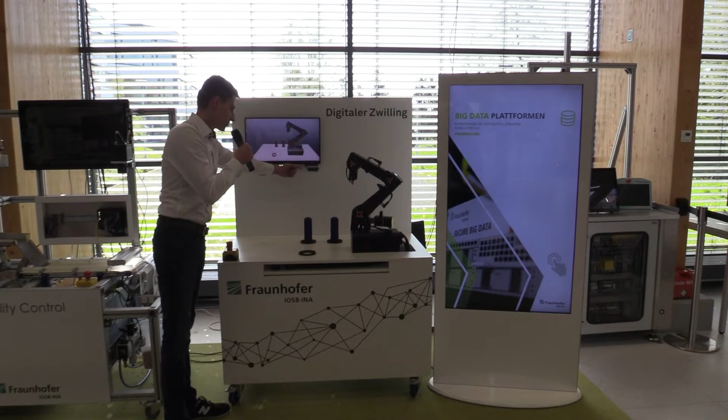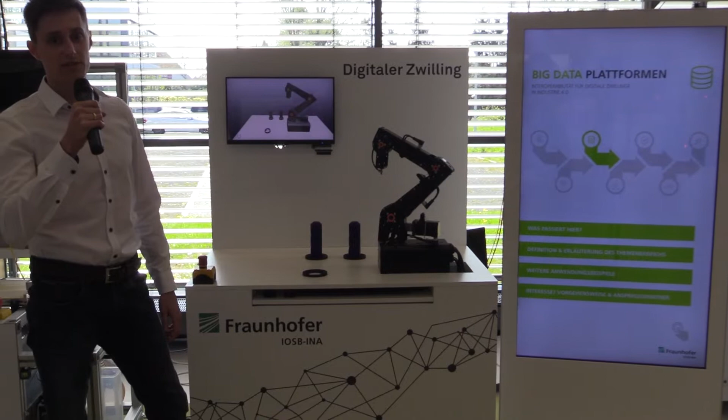The demonstrator itself consists of this igus robot, the digital twin of the scene, a depth camera over here, 3D printed cubes, and last but not least also a start and stop button. The original idea of this demonstrator was to evaluate the synchronization capabilities of OPC-UA and how we can integrate it to synchronize the digital twin with the real system.

The task of the robot itself is to grasp the cubes that are located at the rear trays, pick them up, and stack them one after the other on the front tray. To do so, the real state of the distribution of the cubes needs to be precisely measured and synchronized with the digital twin. For that, we have installed this Intel RealSense depth camera over here, which captures the real state, and I want to show you that.

As you can see, when I move the cubes around, I hope you can see it on the camera, the digital twin directly updates its state, and it's working. Another benefit of this is I can catch error cases like when a cube is missing, for example when it fell off during grasping. I can catch that, warn the user, and tell him to restore a valid state manually.

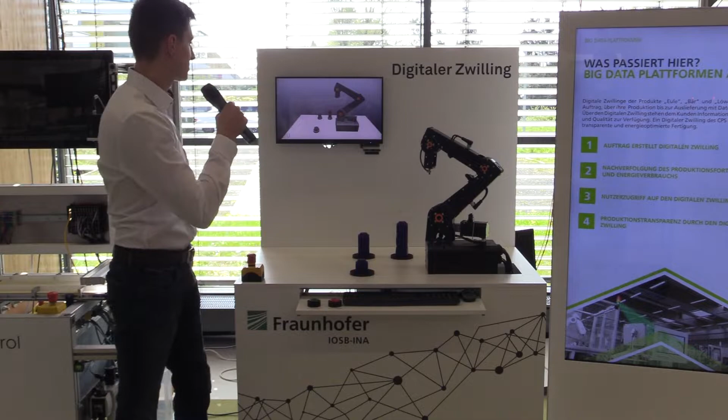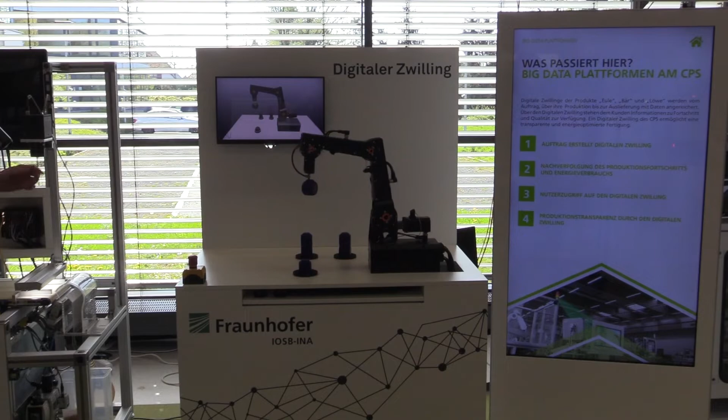But now let's see how the robot performs in action. The robot automatically detects the state and approaches the largest stack, and then continues with stacking the cubes on the front tray. But an interesting part of the demonstrator is also happening in the background. There, data is being gathered using OPC-UA and an InfluxDB database, and it's being brought to this big screen here.

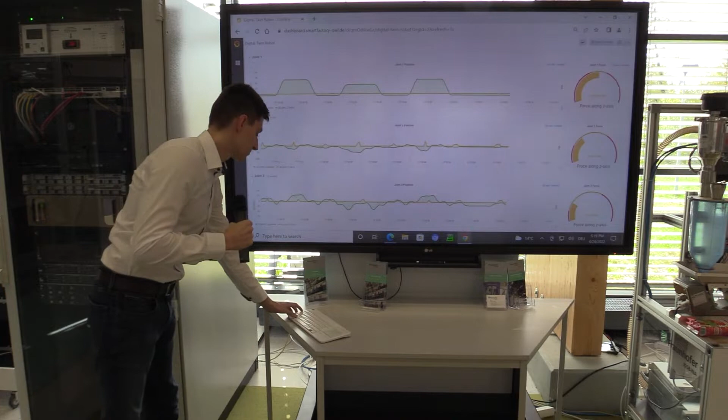For example, on the right-hand side, we have the velocity of the end effector, and it's being updated every second. Also, we see the state the robot currently is in. For example, right now it's stacking the cubes. We can see it here. Well, it's called assembly here on the dashboard, but there's also an inverse task of storing the already stacked cubes back to the rear trays. Also, we can see the individual joint values of the robot and the current forces that are acting on each joint.

Now, I want to show you the overall architecture of our demonstrator and the data platform behind it. On the right side, you can see all the visible and physical assets of this demonstrator, and here on the left side, there is the data processing and computing. Our newest addition to this architecture is the asset administration shell of the robot itself. It's being integrated using an OPC UA server, and for that we use the OPC UA companion specification, OPC UA for asset administration shell.

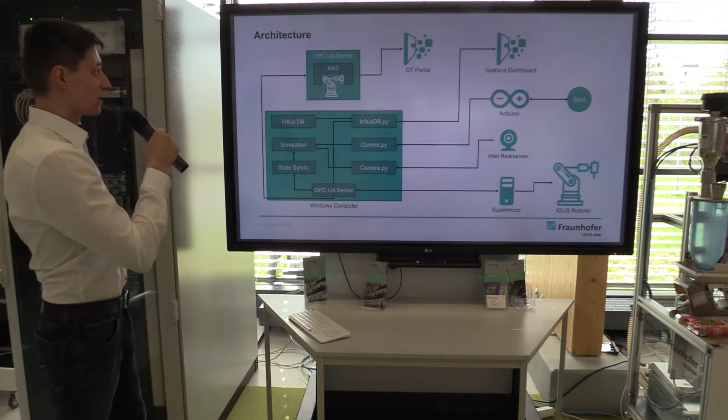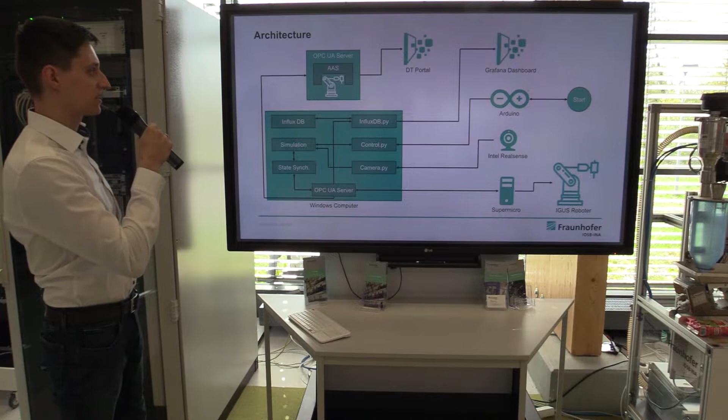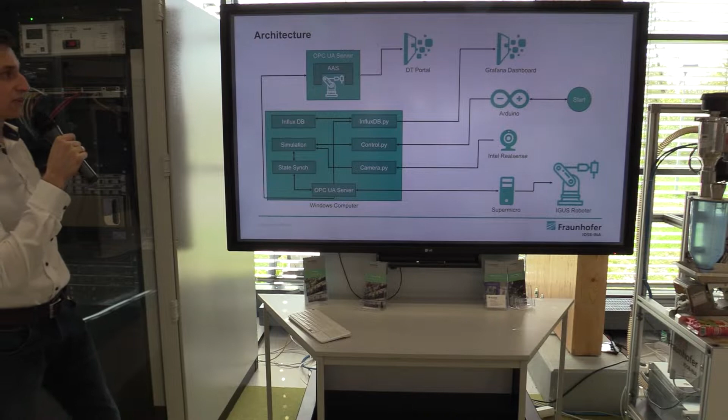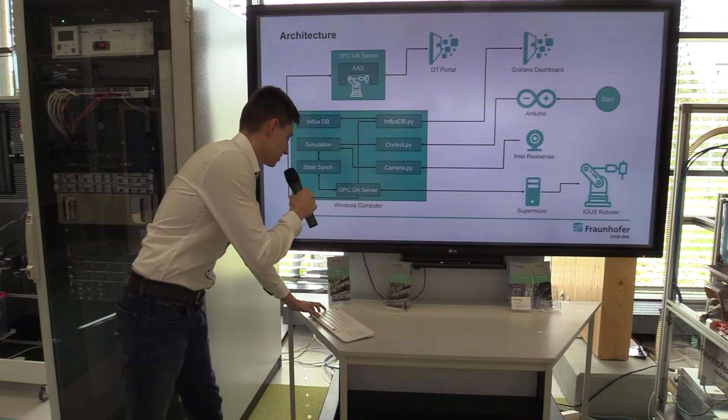This admin shell is being visualized using our in-house software that we develop. It's a part of the software called Digital Twin Portal, and it can be used to visualize data right from the admin shell. This portal is a Node.js web service that supports two different types of admin shells, namely AASX and, as we use it here, OPC UA. And now I want to also demonstrate to you what this web portal looks like.

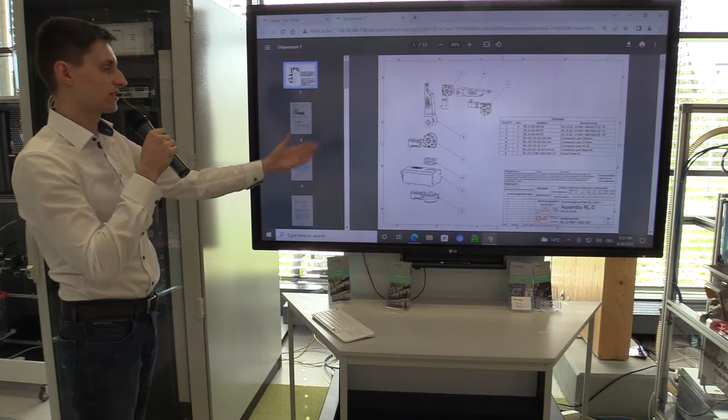Furthermore, we also have the documentation submodel available, and this brings a lot of benefits to us. For example, having the documentation readily available when the product ships saves money and time, but also reduces resource consumption on the manufacturer's side, because I don't have to print a stack of papers that costs money and needs time to ship. Here, for example, we can also directly visualize the PDF document from our tool, and here is the data sheet of the robot and all of the components the robot consists of.

Furthermore, we also have the submodel operational data, which holds the process data the robot produces. We can visualize this, as we have seen on the Grafana dashboard, seeing the individual joint values, and we can let them update in real time. If we press the play button here, you can see as the robot moves those values change. But we also have another feature: we can draw directly a graph with the values we have selected, and it updates in real time as the robot moves.

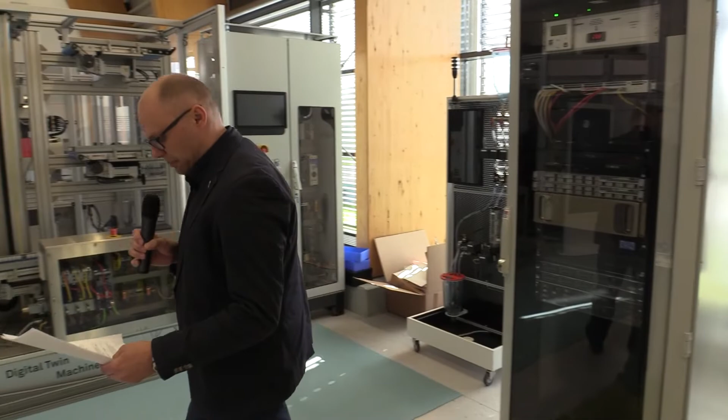Thank you, Mark, for this very interesting presentation and very practical application for the digital twin. So now we will go one step further, and we will see how the digital twin can be used to build a production system. Here we have, of course, not a big plant, but we made a small version

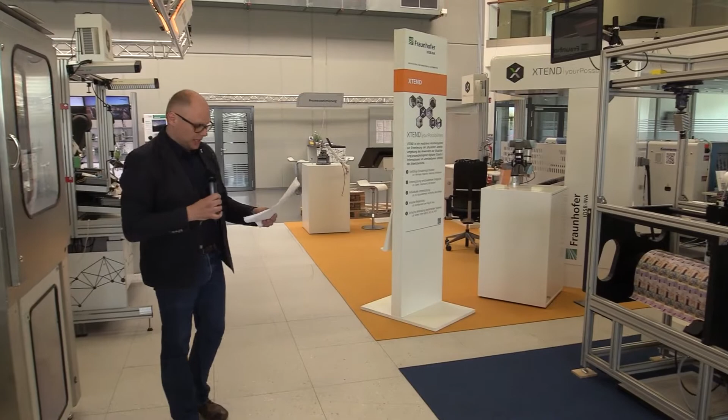of the whole production system, and we used the digital twin technology to implement skills of production components. So in this case, let's say every production module can express which kind of skills it has, and whenever a skill is needed in a production process, it can be used. So we want to welcome again Henning, who will tell us a bit about this exciting project.

So Henning, you're again the speaker. Yes, thank you. This time without any introduction, so you know me already.

What I would like to introduce here is one of our demonstrators, which was constructed as part of a research project called DEVEKOS. It's over already, but as you can see, maybe here on this field there were a lot of companies involved. Not all of them were involved in DEVEKOS, but some of them, and as part of the project we assembled this nice demonstrator, which is a real manufacturing system for fidget spinners.

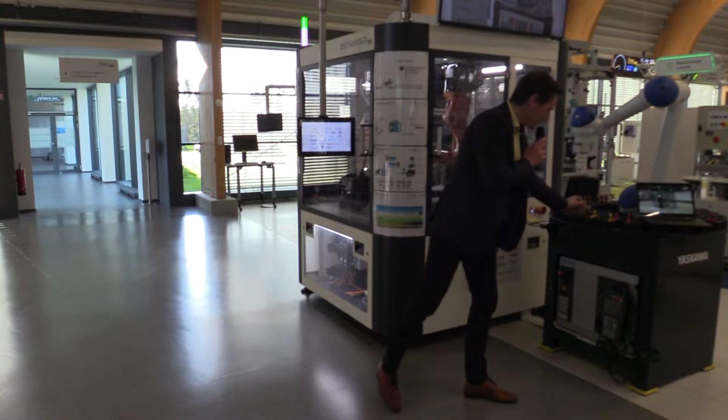You can see them right here. This fidget spinning device might be still known to you. This was a hype a few years ago, and at this time in 2018 we decided to build them with this manufacturing system, but right now this hype is already over, I think.

What we are doing here is we have a system consisting of altogether 6 different manufacturing stations which are assembling this fidget spinning device, and all of them are set up in a way that they are decentralized, so there's no central PLC as part of the whole thing. Instead, all the different control functions are implemented on a per-station level, and the new thing, which was already introduced by Lukas, is that we are doing this skill-based.

That means we also have a kind of digital twin of each station, modeled as a skill-based system using OPC-UA. So we are also using OPC-UA for this, and all those stations are able to communicate what they are able to do in the end.

And if you go further down here, you have a kind of hierarchy. If you look into the different levels, you can see that we are here on top, at the level of fidget spinner production. This is the whole system. If we drill down further, we see that this is one station, and this station consists of substations, and all substations have a specific skill which they are able to publish.

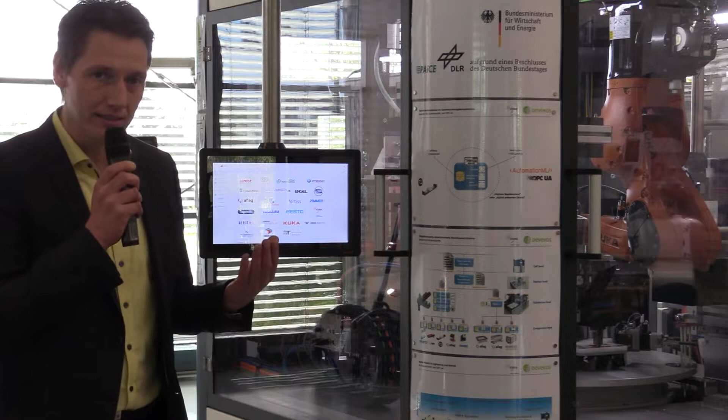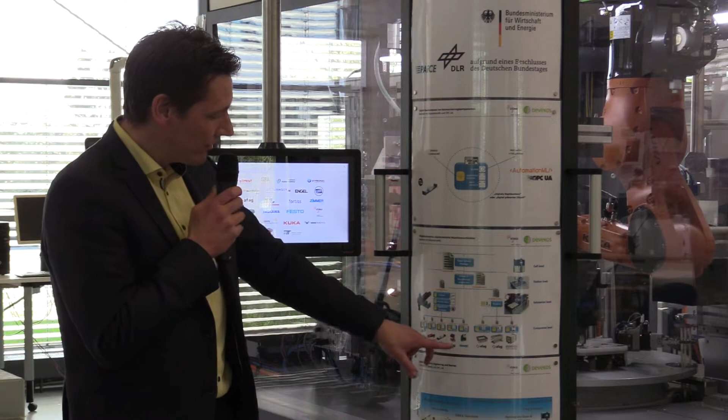And then based on these skills, we can set up the engineering in a completely new way, compared to the old times where everything was done more on a centralized level. And we can further drill it down even to certain components which have some intelligence on board. Maybe in the future it will be further extended, but right now it's a little bit limited, let's say.

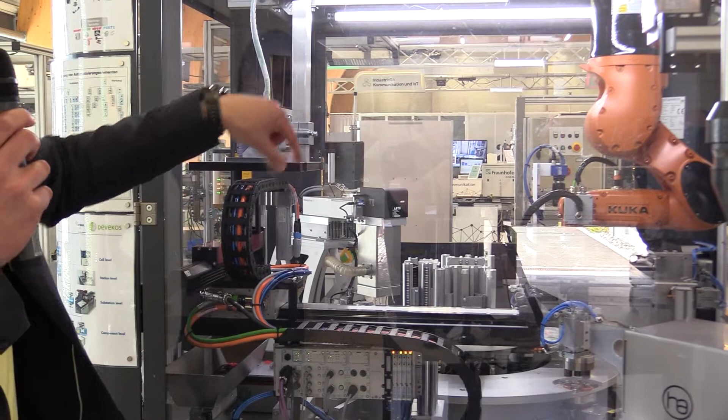If we go into more details, let's drive around the corner and see what's going on here in the system. We can see there's a real robot arm as one station taking the first part, and then it's turned around as part of the manufacturing process. In the end, we get out our fidget spinner out of this thing.

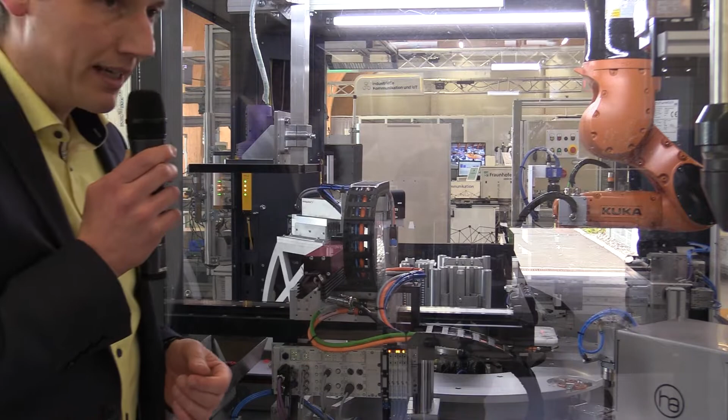A very interesting topic here is that it's basically an activity of a lot of companies, and everything is working in an interoperable way. So we were able, using OPC-UA, to put everything together from different companies, and everything is working together as intended, which is quite hard sometimes. Here it works because of OPC-UA as the main basis or main technology.

That's one part we can look at. And speaking of the digital twin, we were also able to provide a whole model of the system in a virtual way, which can be used in the same style as we saw before on the station, using graphical representations, but also looking into details of each station to see running parameters of the operation of the whole system. I would like to show this to you as well.

Maybe Lukas, you can give me a hand with the microphone. Sure, because I need to hold my laptop in a way. So I hope you can see it. What you can see here right now is a virtual representation of the whole demonstrator. This is openly accessible, so if you like, you can also go to that website and take a look into this by yourself. So this would work.

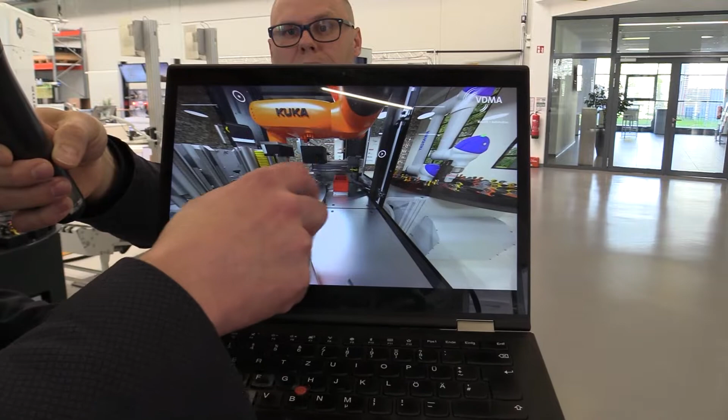What you can do here is walk virtually into the demonstrator, into the whole system, and take a look at the different stations you can see right here. Whenever you think you would like to have more details, you can just click on those different topics. You'll have additional information here, more or less as a data sheet for this specific station or substation, and here you can get all the details you would like to have.

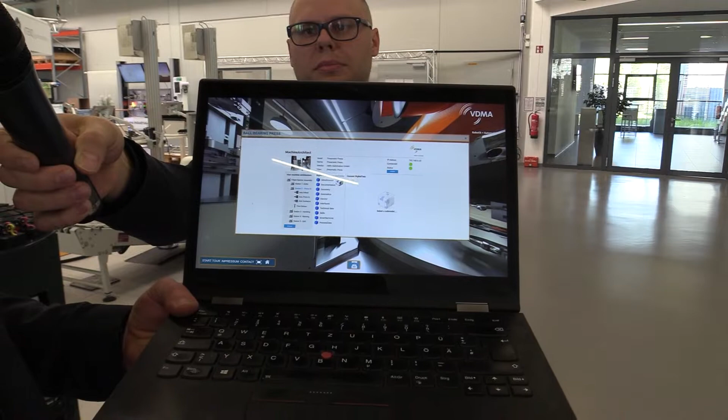So that's already an exact virtual representation, at least with a limited amount of information. It's not modeling all different steps, and you cannot see everything in real time, but it's at least the first step to make it visible to an operator or to maintenance personnel or whoever needs it.

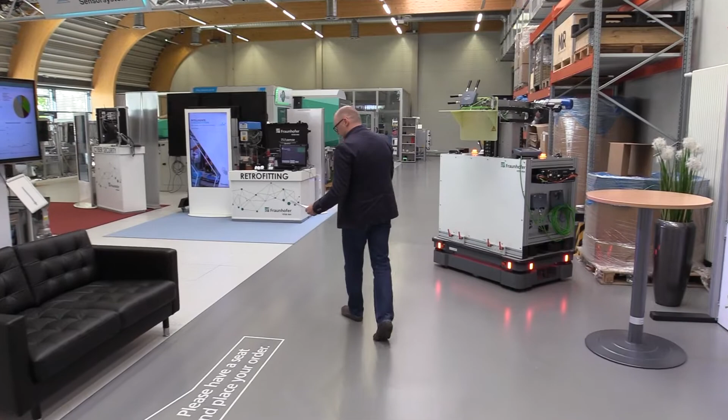We have a few more digital twins around in the whole smart factory. However, we will not show them to you right now. So right now we are actually starting with 5G or communication topics, more on higher layers. So right now we will talk about 5G, and we have in the smart factory obviously a campus network.

And we have also an expert in 5G who is not only a researcher here at inIT, but also a deputy chair in 5G-ACIA. Welcome, Arne. I guess you will tell us a bit more about 5G in the smart factory. Thank you, Lukas. Hello, everyone. My name is Arne Neumann, and I want to give you some overview about our 5G activities, which we have here in the SmartFactoryOWL, the application of 5G and also our research on it.

So we have an installed 5G system here, and the first step we needed to do when starting with this activity was applying for a frequency license. Since 5G New Radio operates in licensed spectrum, we had to apply for such a license, and we even had to contact a federal authority for this. The process was not very time-consuming, not very difficult. That was a really nice surprise.

After that - so the frequency range we use in Germany is from 3.7 to 3.8 gigahertz. And the second thing we needed to do is purchase a system. Actually, we have two systems installed here in the SmartFactoryOWL.

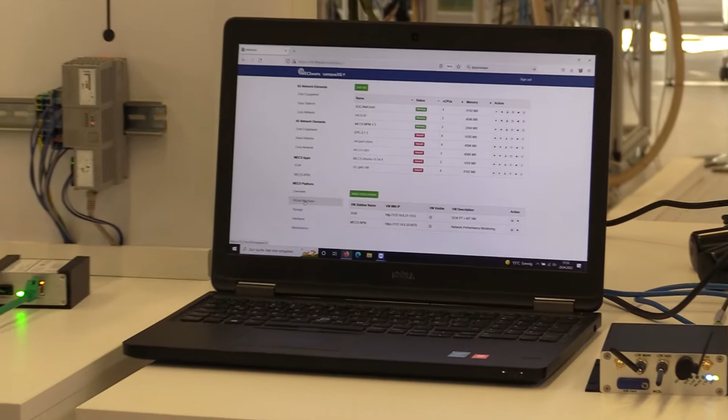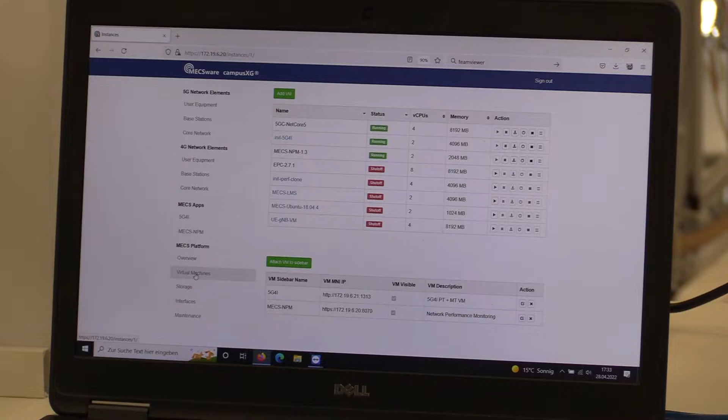So the system vendor is MECSware, and you can see here the dashboard which is provided by this company, which shows the server infrastructure. So this server does not only host the 5G core network, but also virtual machines. This shows some edge cloud capability. And we also have virtual machines running some processes in this edge cloud, like here inIT 5G4i, which is a virtual machine supporting some early results of our research project 5G for Industry.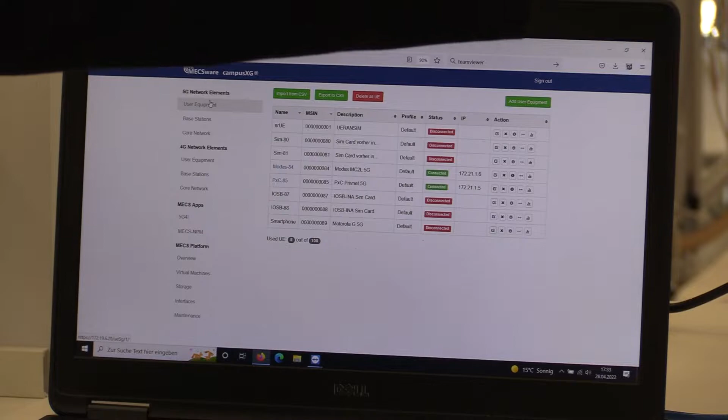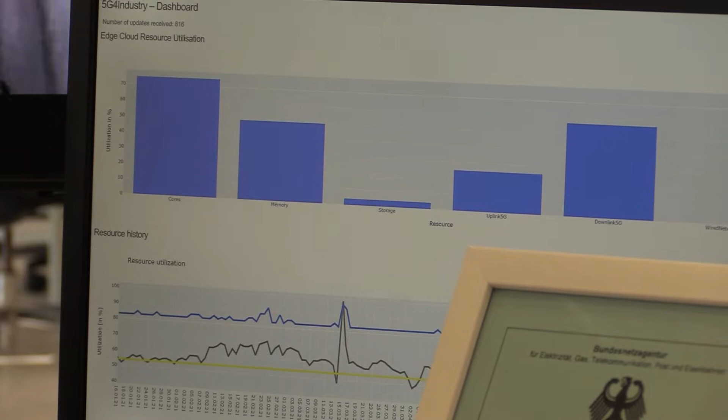Another view shows the user equipment, like here. So you can see that a couple of user equipments are configured, but only two of them are active at the moment. And on the other screen, on the right-hand side, you can see the dashboard from the 5G4Industry project.

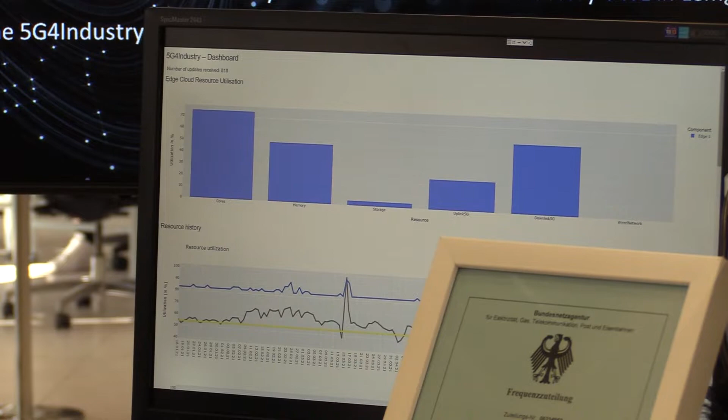So this project aims to support both the long-term planning and the short-term management of ICT infrastructure in the production, which is like a backbone for the factories of the future and supports concepts like edge cloud computing and function virtualization, softwareization.

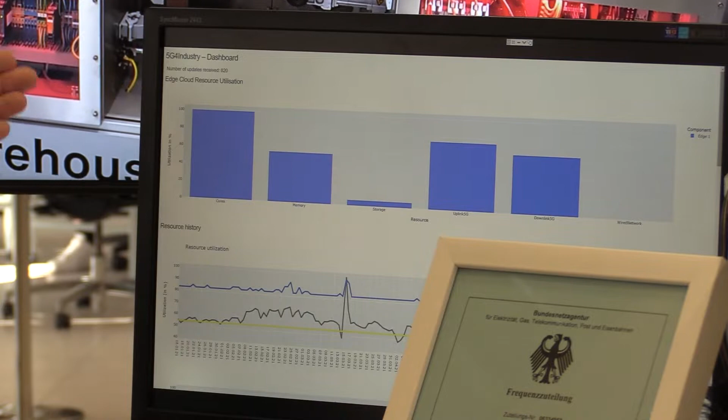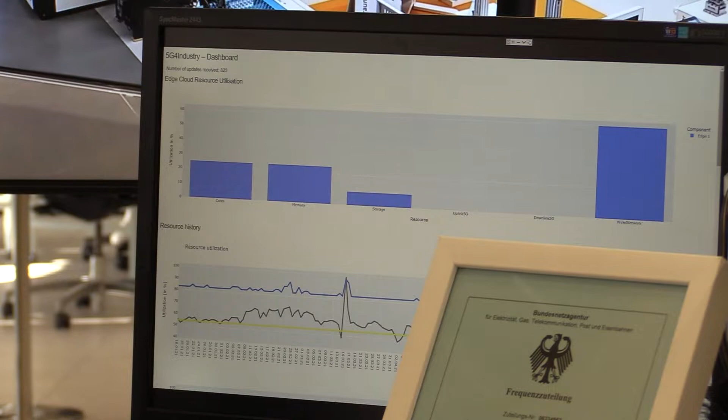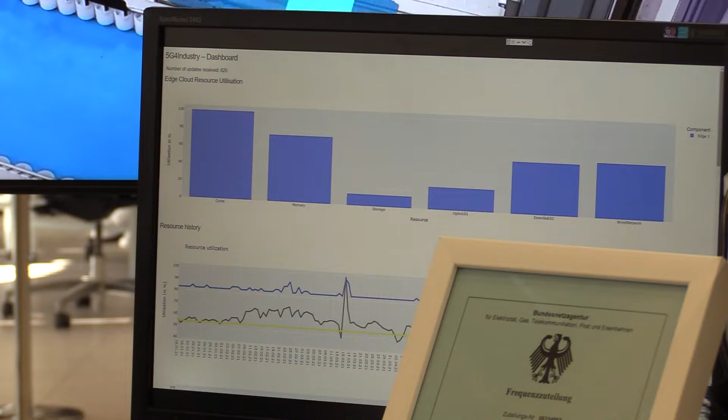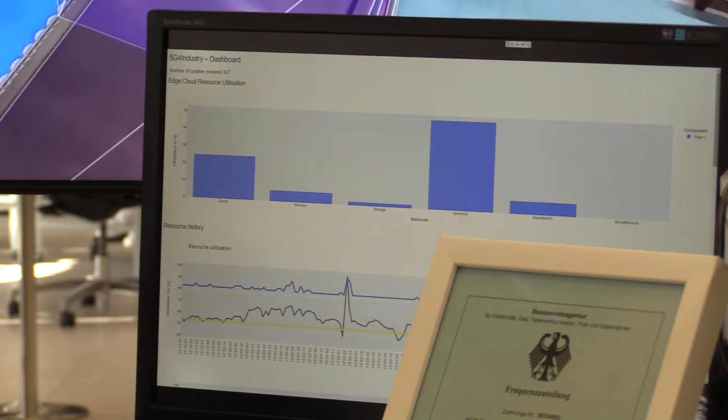And this dashboard is a first drop of this research. It monitors different kinds of resources, network resources as well as computing resources, and even memory resources, volatile and non-volatile. We use it to also get some user experience, whether the presentation is useful to customers or not. And also some of the data is still preliminary historical data or simulated data. So the project is still going on.

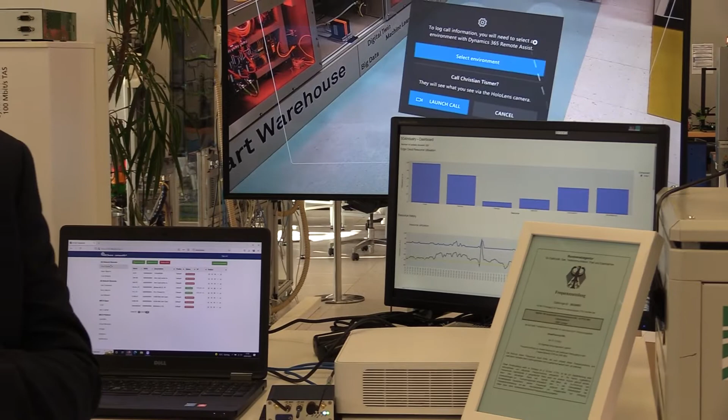And some industrial application which we have is 5G. You can see it in the background in the video there. It's a use case for the 5G for Industry project for smart maintenance. So we use a HoloLens to support a maintenance engineer who has to find some errors in the system or in the machine. And the HoloLens captures 3D models and renders the models, is able to detect elements in these models, and so the maintenance engineer can be guided and can also establish a connection to a remote support to be guided from them in a manual way.

And with the 5G connection of this HoloLens, it's also possible in case of resource constraints on the lens that we outsource some processes to the edge cloud. That means to the MEC server, which is directly connected with our 5G core network. Thank you for the introduction.

So we stay with the 5G topic, and we go to Timo, who is working at Fraunhofer, and who will also explain to us a bit about their activities. Especially, I think quite interesting are the precise measurements that they are doing with the very nice equipment, which is quite crucial for wireless communication. So Timo, please explain a few more words about that.

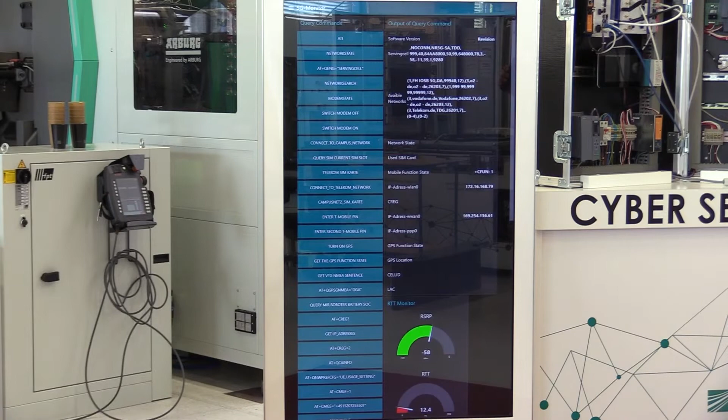Here in the background we have our 5G monitor. This is developed by Fraunhofer, and there you can see some parameters. The network parameters are on top, and our system searches all networks available in the area, and we have also some performance parameters, and we can actualize this.

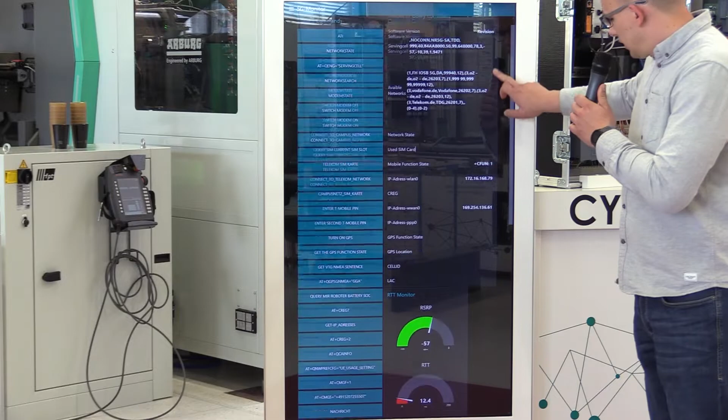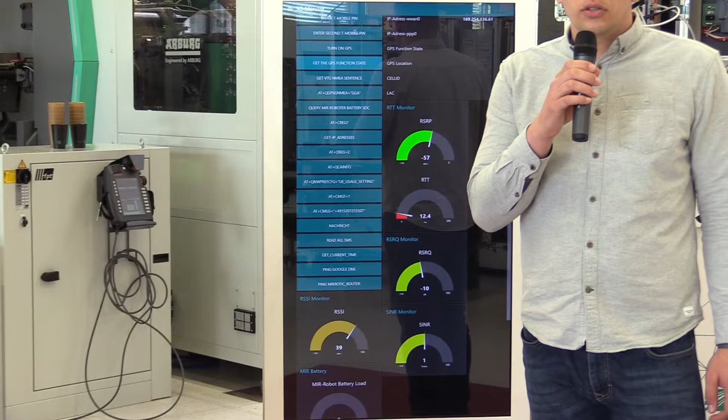And we measure the network coverage, because as you probably know, the network coverage increases or decreases strongly the network performance, because as your distance increases, your modulation performs weaker, and the network speed and the latency perform weaker.

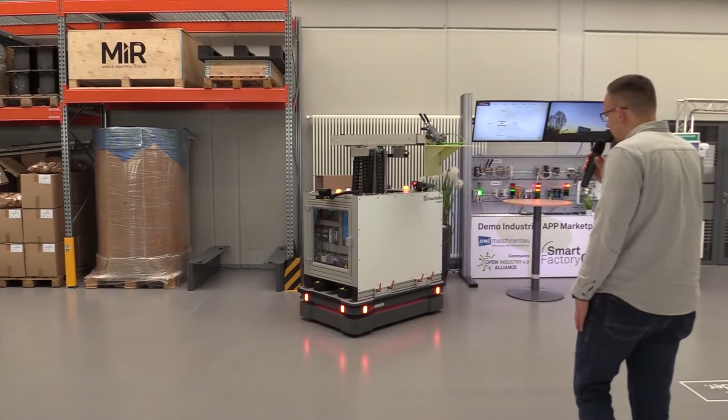And we have, for this purpose, a system we can go over. The system is called the 3D positioning system, which means we have an AGV, the automated guided vehicle. This automated guided vehicle drives through our smart factory autonomously. It can draw a map from the building, and with this system we are able... Lucas can help.

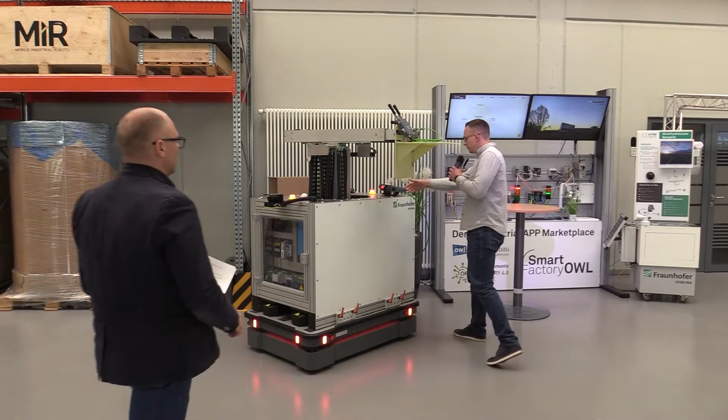We are able to move in three-dimensional room. For example, we can move the lift up to 5 meters in height, and on the lift there's actually a Siemens industrial router, and we can measure the performance with this router, and we can also turn this 360 degrees and move this lift, and we are totally flexible in moving around.

And what is special on this device, we have here the opportunity to make tests under real industrial conditions, which means we have multipath propagation of the radio waves, and we have distortions because of high electromagnetic fields. And we are not only testing the industrial rugged devices, we are also testing with 5G commercial devices, and we are able to work together with our other departments like IT security and artificial intelligence and assistance systems to build and test the whole 5G ecosystem.

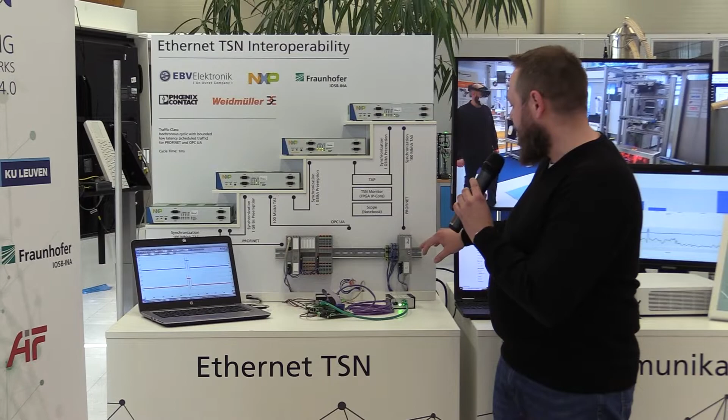We have a Profinet communication, we have an OPC UA communication, we have a single-pair Ethernet connection, and we have time-sensitive network. We also have different link speeds with 100 Mbit between the switches and the end devices, and we have 1 gigabit between the switches. Also, we use different time-sensitive network technologies such as preemption or time-aware shaping.

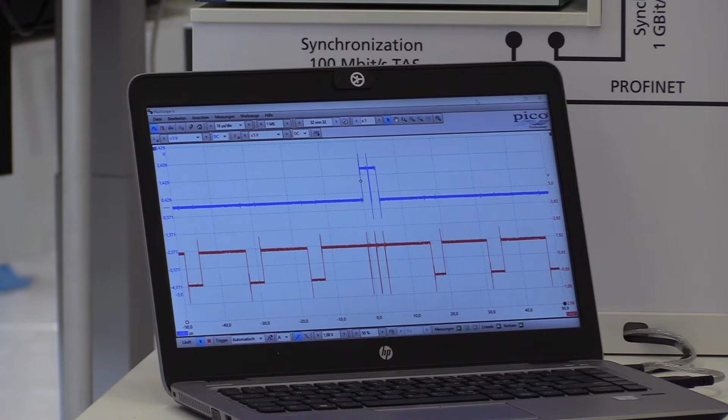As we can see here, we have 2 frames on the scope. These frames are monitored with a measurement solution called TSN Monitor. It's an FPGA-based solution which is developed here by us at Fraunhofer IOSB-INA in Lemgo. These 2 frames use the same communication class, and we also see that we have some network load that we introduce into the network, as you can see now.

And the communication class of the OPC UA frame from the development board and the Profinet traffic is not affected by the net load. So a first impression of the potential of TSN and the 3 other communication technologies.

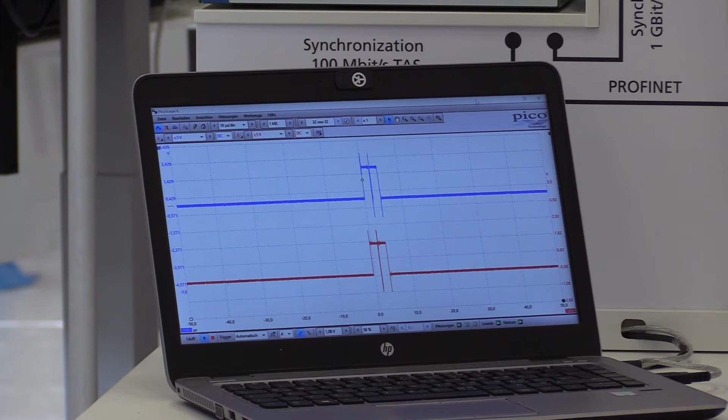And yeah, it was a very short, let's say, insight into this topic—convergence in the industry. It's a very relevant topic, and these are, in our opinion, the enablers to make these networks more simple and more easy to manage. And of course, still keeping them high performant.

Yeah, so right now we are going to the last of our presentations. So this is, let's say, our highlight at the SmartFactoryOWL, which is a real production which has been set up here under the roof of a smart factory. So real production means that we are producing real products that are sold at the end by the producer. So there's a much higher expectation in terms of quality and, of course, the costs that are related to the production.

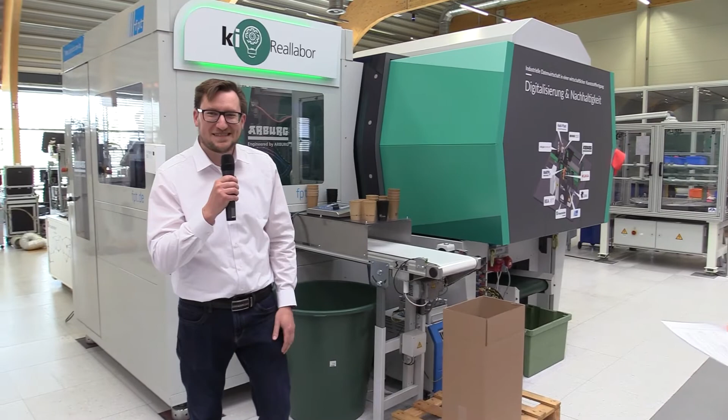So we have here a real production, for sure. Our main purpose is test equipment, to have test equipment and test different new technologies if they are feasible, good to build in real machines. And if they are in a very good state, then we can directly test it here on the shop floor side, also in a real production.

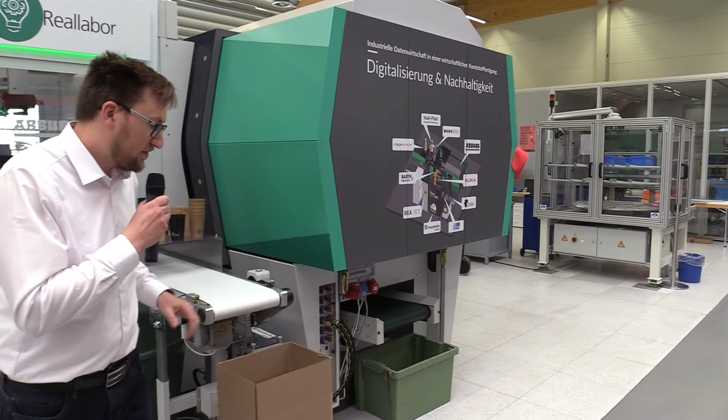And therefore we have a consortium of different manufacturers, for example, Arburg, who's the developer of this machine, and also some vendors for the equipment, for example. And with this strong consortium, we have a product from the vendor Kuna. And these products are coffee cups.

And these coffee cups we can also individualize with a logo, for example, and have different logos and texts, but also the color, as you see, can be different. And now it's not producing, but I can also show you how we can laser different texts, for example, and individualize these cups.

For us here, this is also a data generator, because if we implement some new software, some new technologies, then we need measurable capabilities. So we need these KPIs, the overall equipment effectiveness, these numbers to check if the new technology is very useful, helpful, or maybe not.

And in most cases, if this machine or this technology will be implemented in an external factory, then our experts maybe don't get this information very soon, maybe too late for this factory owner. And here we have now a real production where we can make these innovation loops a little bit faster. And therefore we need this data. And that was the first goal, to get this transparency of this machine and the transparency of this data.

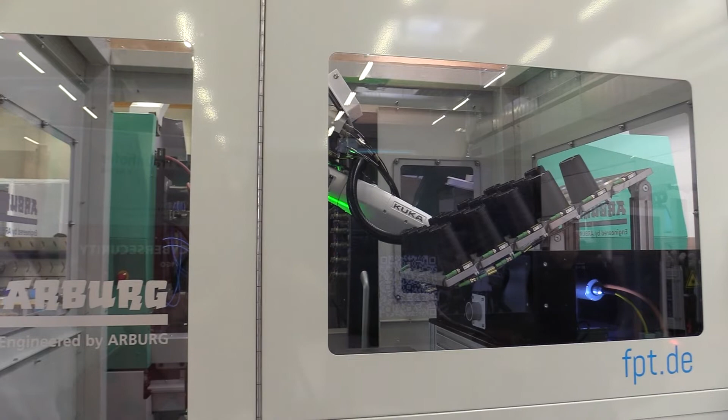In the meantime, I will also start the robot, so that we can see the data changing on the screen. On the top of the robot over there, we have this box which generates additional data to the production data. And when we see some movements here, inside this window you can follow how the text will be lasered. But in the background, now you see the robot moving.

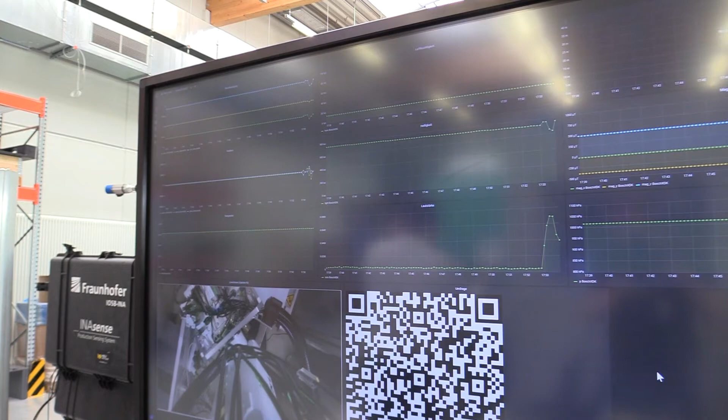And for maintenance cases, we can follow, for example, on a screen over here, the data of this robot now. But this data comes only from this box. For sure we have more data, but I want to show you now the information from this box. Here we have a live stream, so we can follow not only the production data, some peaks in the rotation, and, for example, acoustic, because maybe you hear it, it's a little bit louder here. And now we can combine the picture with the data.

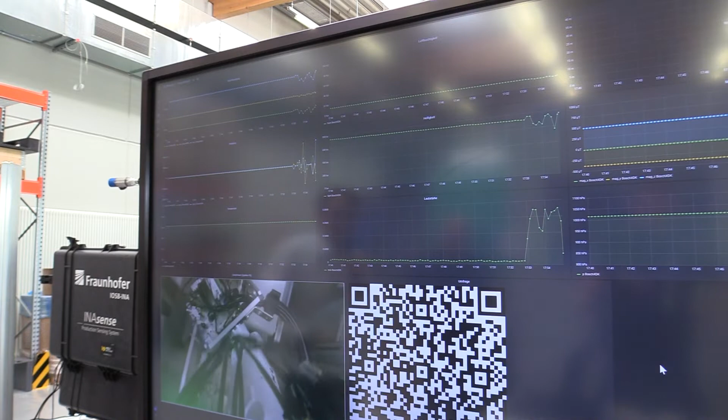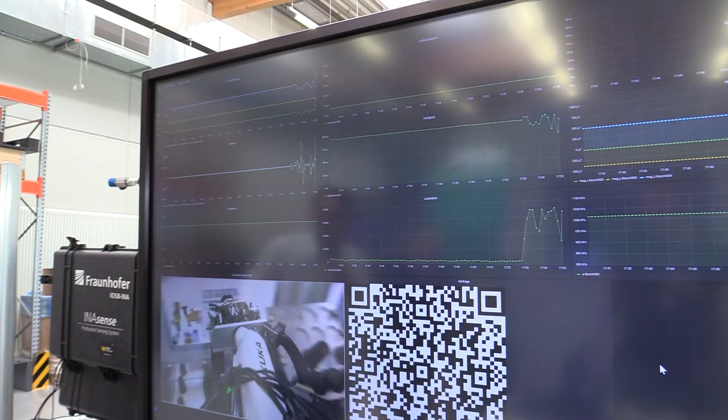And in the next step, we want to use artificial intelligence to optimize and find anomalies, for example. If something is changing in the process, then we can also look in the past at what was the reason for this problem, but we can also forecast some problems where we can say, okay, we need predictive maintenance because the robot is maybe driving slower than normal, or maybe we have some anomalies in the cables, for example.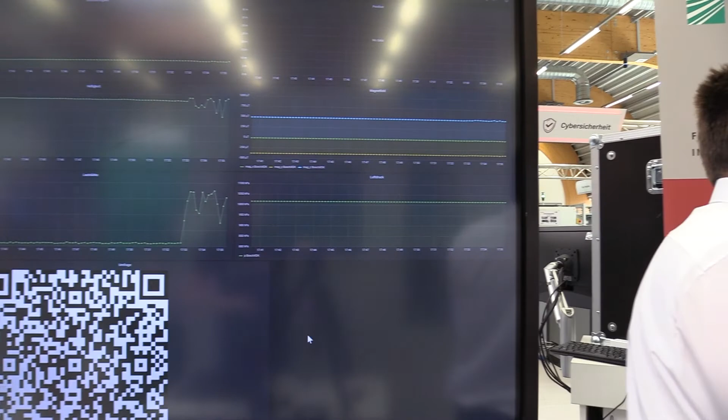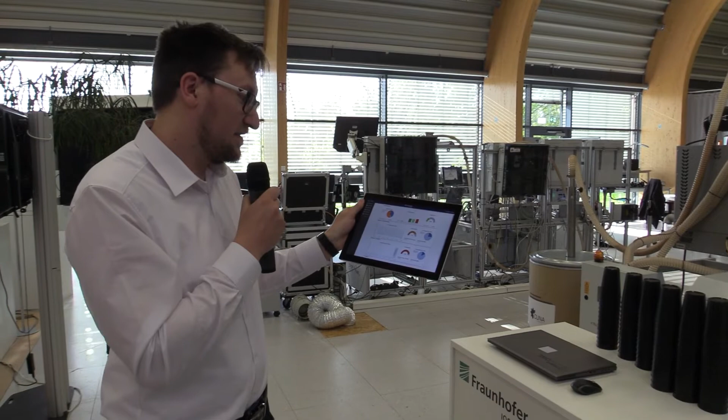Okay, when we go a little bit over here along the production, then we have transparency, which I said was the main focus in the first step, to see all the production data, and now in different UIs for the different people. So for the AI experts, we see some data, but for the machine worker, here we have a different interface, because the machine worker also needs information, for example, the KPIs of the machine, or the energy data.

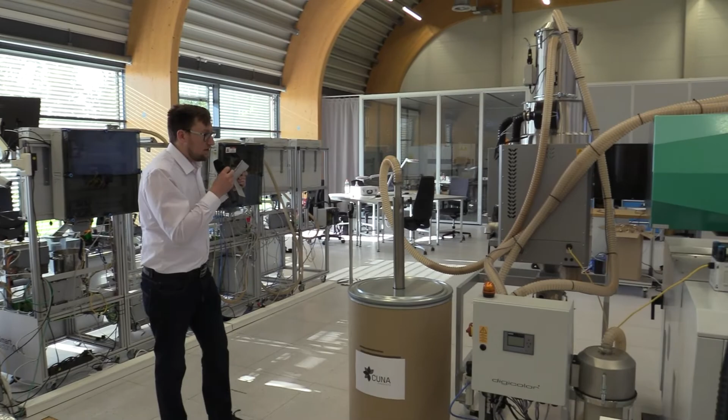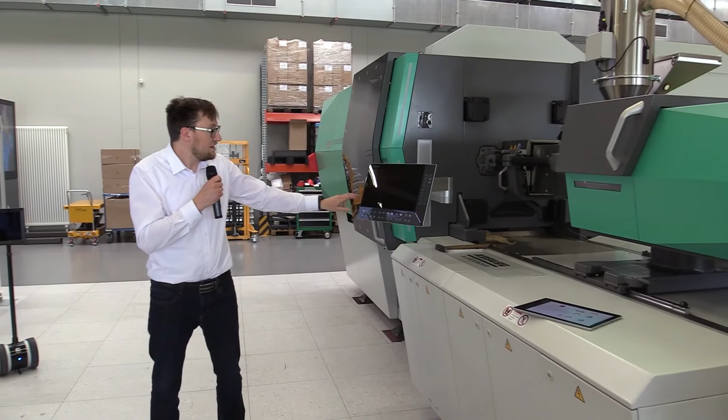This is a small device. We can also look on a bigger device when we go a little bit further. And we see also more equipment of the machine. So there is an air conveyor, and all these devices for sure have different interfaces. And on the small tablet here, we are mobile. We can go around different machines and see and follow the data.

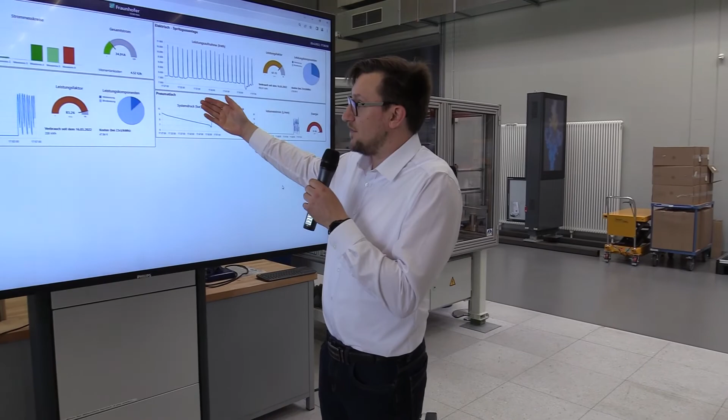But we also have the possibility to go on the machine interface, or here you can see now the interface where we have all the energy data, for example. And for the retrofit device, we need 5G, for example. Here we need classical fieldbus devices, and all this data goes into an InfluxDB database, and we can collect it, and now we can do different tasks with this.

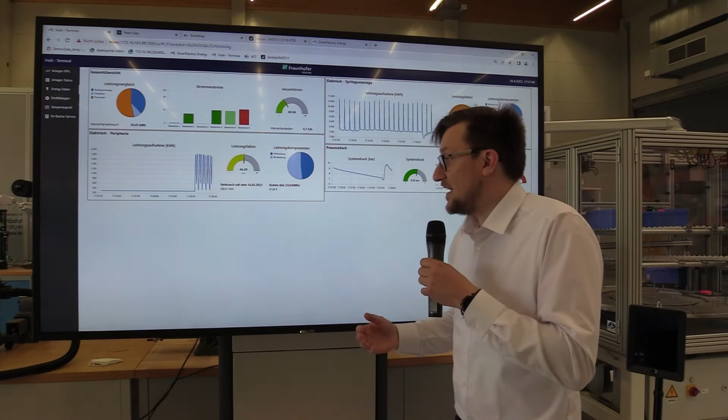For example, to make a footprint, an energy footprint, a CO2 footprint, of the device, of the machine, but also of the product. And therefore we need all the data, pneumatic, for example, but also electrical energy. And the people who are working on this machine can check if everything is okay. And therefore transparency is the first step.

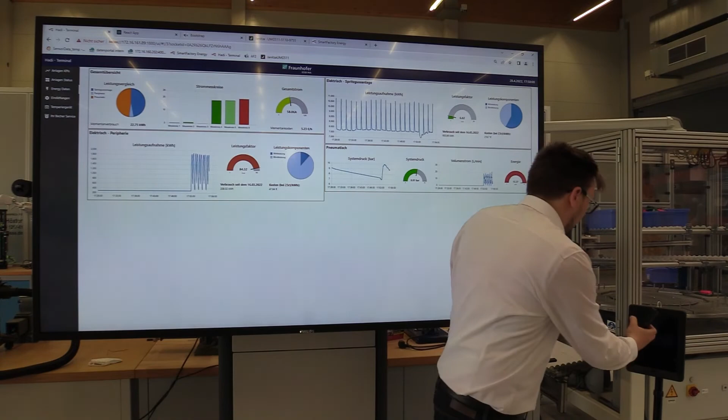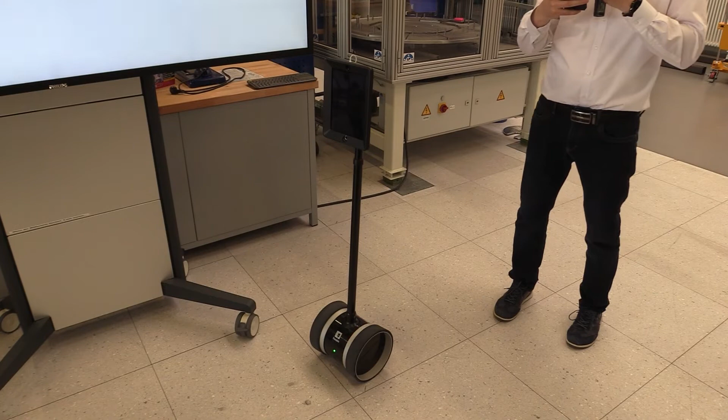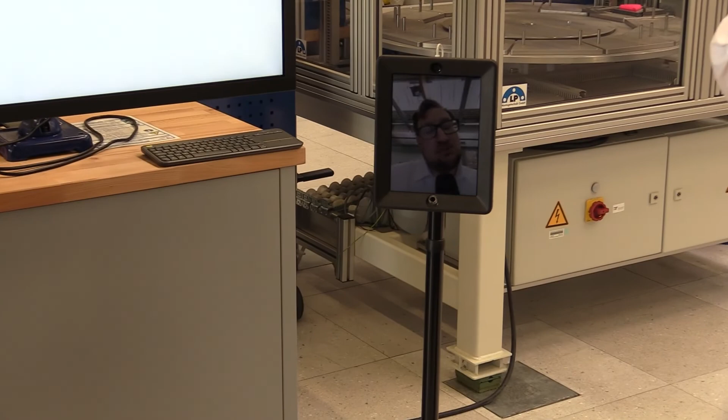But it is also thinkable that maybe in the future the worker has some virtual colleagues. So here we have one device which looks like me, and with this device we are also mobile to check around what is going on. And there we also need strong Wi-Fi signals, but also 5G, to check all the machine data, to check if something is wrong. So if we get an event from this machine, then the first step is to look what's going on. Can we solve it remotely, or is it maybe necessary that we call some human expert for the different tasks?

And the first step maybe such a robot can do in the future, and drive around. And therefore, it is also necessary in a factory like this to have very good infrastructure. And I hope you enjoyed this overall tour and got some nice information about what we are doing.

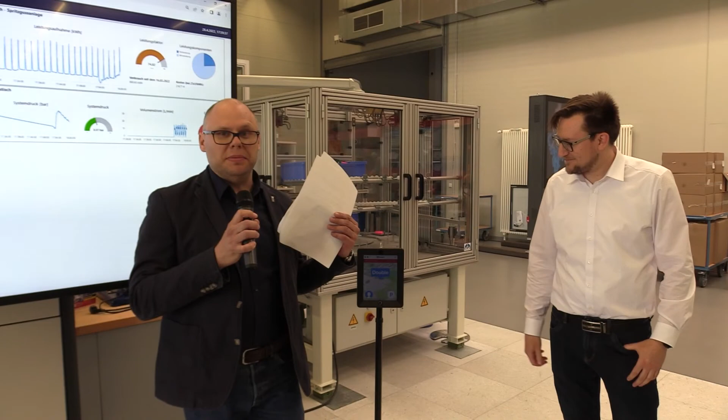And back to you. Thank you, Sasha. So maybe if I can add something. You saw that we are producing cups here. I think it's important to mention that these cups are not made from plastic, but from biodegradable materials. So it's eco-friendly, and the idea is also to recycle them here at the Smart Factory and then use them as material for production.

So that was the last station on our tour. So thank you very much for attending the tour.